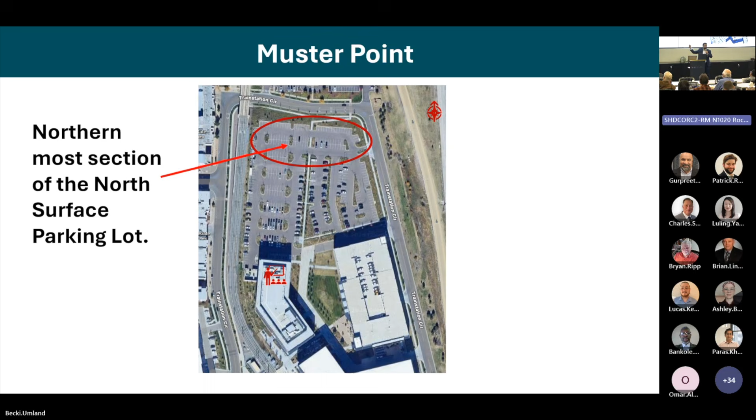If you want to take my photo, that's fine as well.

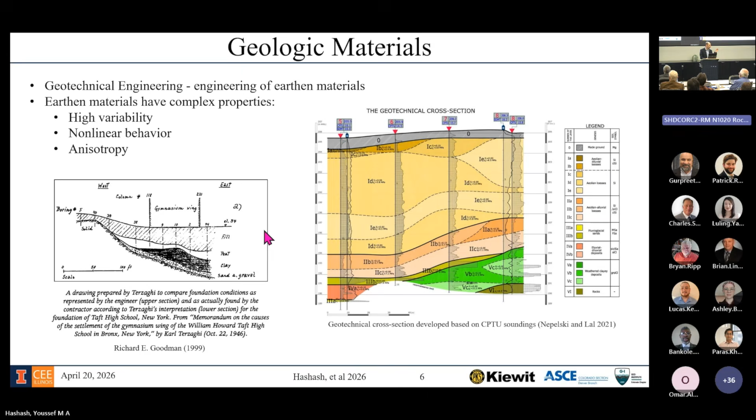And our challenge is not a lot of data—we can never have enough data, right? Now, thinking about the modern discipline of geotechnical engineering...

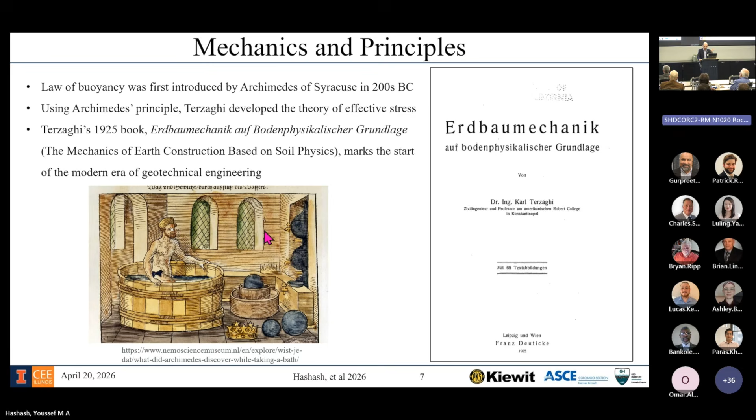Soil mechanics, which is the work that Karl Terzaghi introduced, ushered in the era of modern geotechnical engineering. He cleverly took the law of buoyancy, for example, flipped it, and you got the effective stress principle. Interesting—that's what it is, by the way. The effective stress principle is actually Archimedes' principle, just in a little bit different way. Took a basic concept, looked at it from a different angle. Of course, Terzaghi worked in many, many spaces—soil mechanics, rock mechanics, lab testing, and theoretical work.

He has the book Theoretical Soil Mechanics. So the focus of his is to extract information, data from the tools available to him at the time. Question for us is, can we extract something more fundamental in terms of behavior from modern laboratory data, from modern equipment, and data processing techniques?

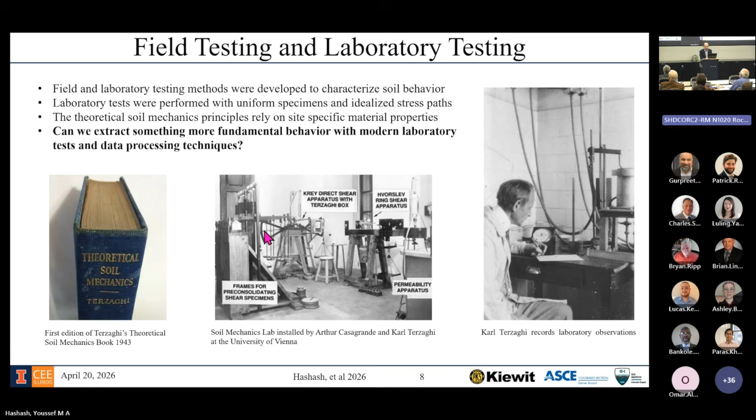The other thing we do is we very much say, you hire an engineer, you send them out to the field, right? Because that's where you're really going to learn about something. Going back to the observational method, which was described in 1969 by Peck, it really all started with the work at the Chicago subway, and of course that's where University of Illinois comes into play. There they established a clear relationship between the excavation support system and the observed deformations, sort of physical world and the response of structures.

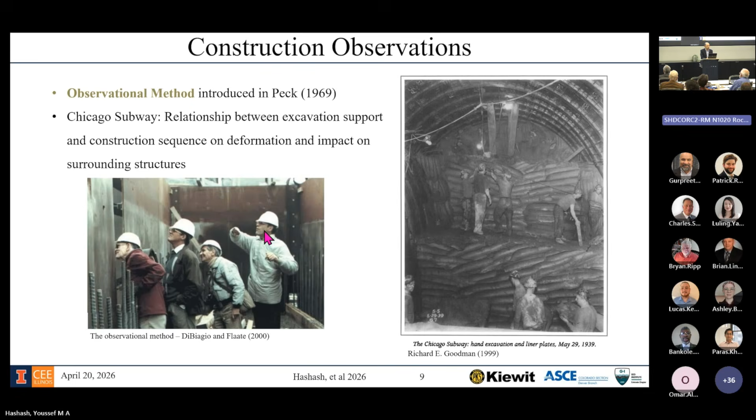Now, if we look at the tools throughout modern geotechnical history, we can go back to 1900 for remote sensing, pigeons with cameras. Of course, now when we think about remote sensing, it's something completely different. It's SPT, triaxial test, CPT, now Internet of Things. We have InSAR, LiDAR, many tools are available to us.

Now, parallel with that, we have tools that we use and we develop to interpret and extract meaning out of the data. Simple graphics, like our plasticity chart, finite element method, going back to '67, personal computers, spreadsheets. Wow, spreadsheets really solve lots of problems. Nowadays, we're dealing with neural networks, and we'll spend a bit more time on that.

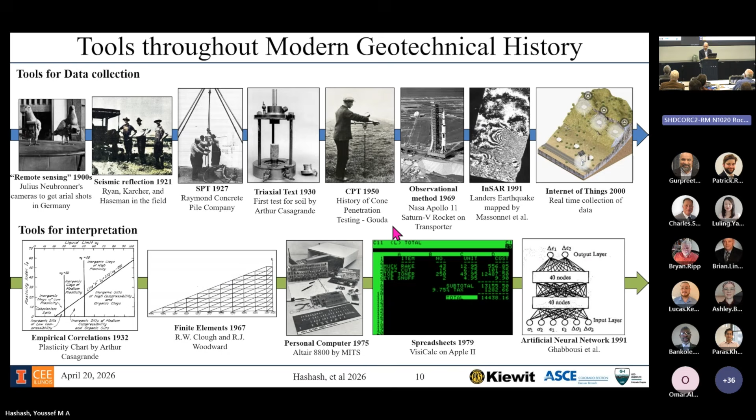So if we think about our discipline, which is heavily an empirical discipline, it's what we call nowadays shallow machine learning. It's correlation between variables. And here on the slide are just some of the ones that we use. Some of them we still use today in our work. But our limited data, which was enough to plot on a graph, has evolved into big data. We are able to capture, save, observe massive amounts of data, almost in a near real-time, near continuous fashion.

The data availability has changed. Instead of dealing with a few hundred data points, we're now at a few million or even upward of billions of data points. The data availability has changed, so shouldn't the tools we use change as well? Let's talk about AI. Give you a bit of a historical perspective. AI in civil engineering and tools, past, present, future. I'm not very good at predicting the future, but I'll speculate.

So the inception of artificial intelligence can be traced back to Alan Turing. If you haven't seen the movie about Alan, please watch it. Brilliant, brilliant individual. Brought in a paper in psychology and philosophy about computing machinery and intelligence. This is 1950. Introduced the Turing test, a method for evaluating whether machines can think. No machine has come close to passing the Turing test. Well, we'll see.

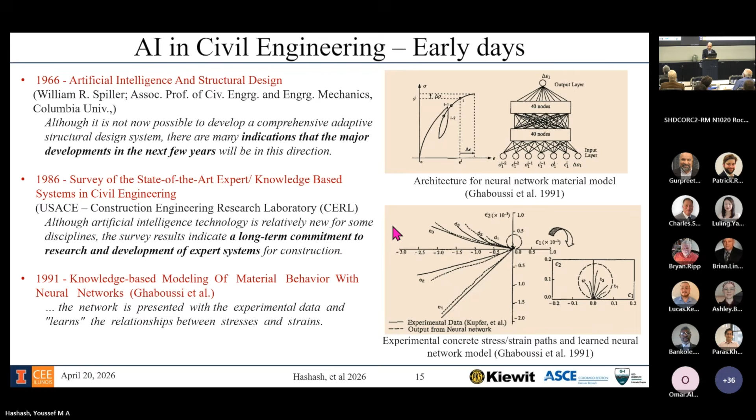So AI, as we know, is I, Robot, 1950. In my era, when I was in college, we would watch The Terminator. And then, of course, Star Wars, drone wars, which are real now.

So let's talk about what is artificial intelligence. And this is helpful terminology from Rome 2021. Artificial intelligence, the science and engineering of making intelligent machines, 1956. And of course, I talked about Turing's as well. You can use it for planning, build control algorithms that will enable an agent to synthesize a course of action that will achieve its goal. Some of what you do with the TBM, tunnel boring machines, is actually planning, a form of AI.

Natural language processing, very important, so that you can actually interpret and turn it into actions. Machine learning, and we can talk about shallow and deep machine learning. And there are many, many different aspects. So we need to think about AI is not ChatGPT. It's not just ChatGPT. There's Claude or Grok. It's a lot more than that.

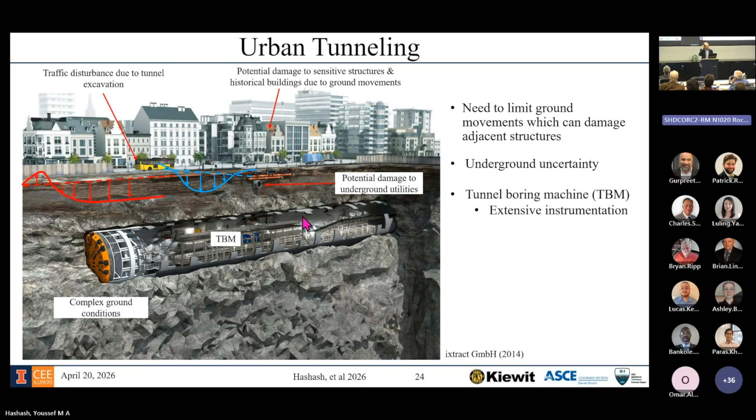The issue we have is in a typical urban tunneling project, we have these phenomenal machines called tunnel boring machines, fully instrumented, nearly fully automated. Some of the newer ones you can actually control from an app, by the way, and you can control every aspect of tunneling. And we are tunneling in ever more marginal ground and also heavily urbanized space whereby we cannot tolerate a lot of movement because of potential damage. So we're trying to control that. So we have a ton of data coming from these TBMs.

Now, we had the fortune, thanks to NSF support, the National Science Foundation. I think we started it in 2017 or 2018, I can't remember now. It took us many years till today, in partnership with the Los Angeles Metro. It's part of an industry-academia collaboration, whereby the kind folks at Los Angeles Metro gave us access to TBM data, all of the instrumentation data for 3 lines, which become 6 tunnels because they have twin tunnels for each. This is a subway that's being built in Los Angeles. And we had the Crenshaw line, the regional line, and the purple line. They changed names now, but this is when we started.

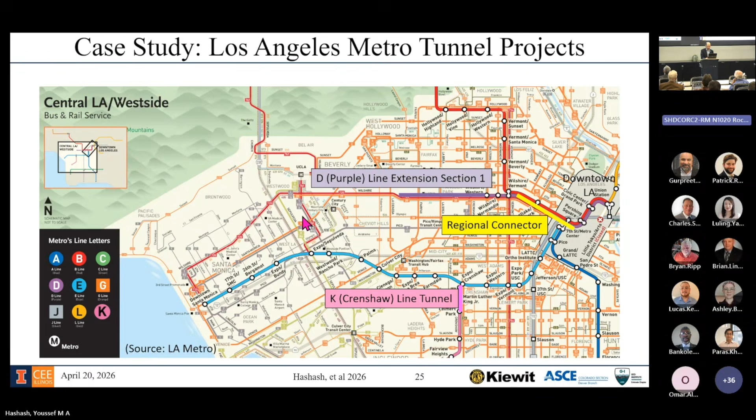So you have these tunnel boring machines. And when you look at the data for these, just to give you an example, for the ground movement we have 3 million data points, and the TBM records 1 billion. And similar order for the regional and purple line. I don't think you can put that in an Excel spreadsheet, can you?

Now, we have 2 choices. One is to trim down, filter the data to have an interpretation, which, by the way, is still important. Don't think that's not important. But are we leaving something on the table? Are we losing or not paying attention to additional knowledge? If we think of data as knowledge, then yes, we're actually leaving a lot on the table. So how can we use all that data?

Well, we have long sequence TBM operational data. We can leverage transformer attention, right? That's the breakthrough. And we create a domain-specific TBM tunneling system tailored for the LA basin. So now it has the local experience, right? We talk a lot about it. I have 6 TBM tunnels and it assists with predicting ground movements, estimating ground conditions, detecting ground heaviness, and potentially controlling the TBM. I don't know if you've been hearing about physical AI and world models. This is the direction these things will be going.

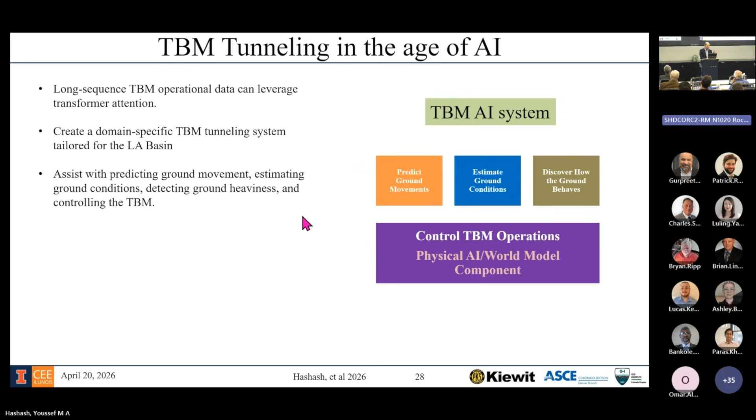I'm not going to go into the details of how we did all the training. This is going to be part of a paper that PhD student Wendy Zhao is working on and finishing up. She's finishing up the last paper and defending soon. In each one of these lines, we have 2 tunnels, like northbound and southbound, or right and left, whichever you call it. We use the data from one, we learn the behavior from that, and estimate the other one. And this is what you're seeing.

Now, I want you to also recognize the resolution of the displacement we're working in, 1 inch, less than 1 inch. We're actually at 0.2 to 0.3 inches. It's actually within the resolution of the measurements. So, but these are the requirements nowadays in urban areas. They want us to be at very, very high levels of resolution, and you need to use the requisite tool to do that. The other thing you can do also, see if you can estimate ground conditions.

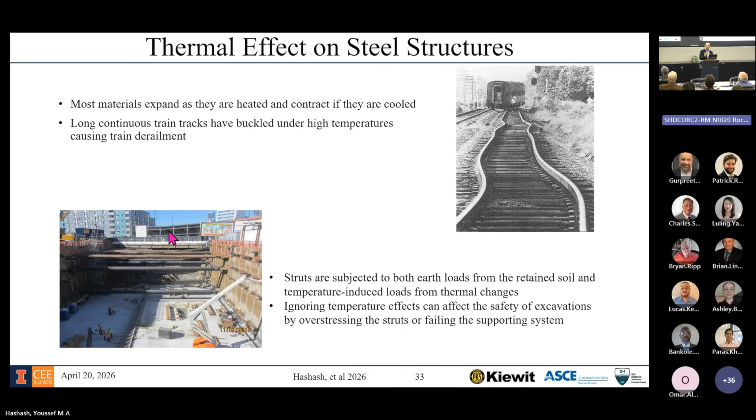But we'll not touch upon that now, but we'll talk about estimating these extra thermal loads, and they can be substantial. Now, the thermal loads are continuous, and the way we see it is that this is an example. We picked a strut from somewhere—I'm not naming the projects—and you can see they actually sync with the temperature changes during the day. It's very clear. We've known it for a long time. This is nothing new.

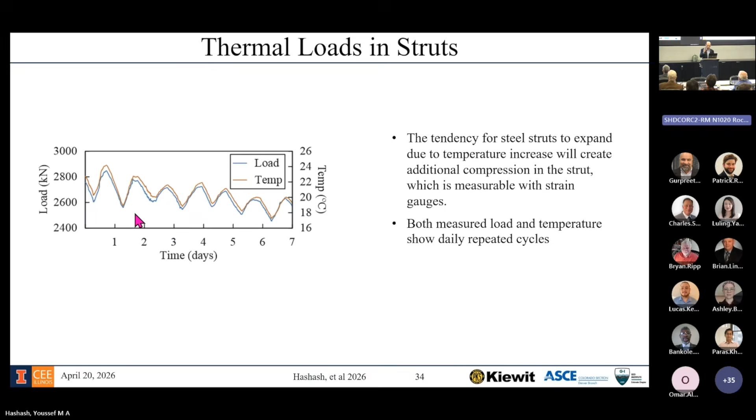Now, there's been many, many studies talking about how you estimate that thermal load. But if you look at those studies, in 2000, we were looking at 1 reading per day. In something we did in 2003, 4 readings a day; 2005, 1 reading per day; more recent, in 2015—not recent, it's 11 years ago—24 readings per day. But on the Trans-Bay Transit Center project, we had 96 readings per day. For the LA Metro, we had them as frequent as 500 readings per day. Okay? Our conventional tools no longer are able to do that.

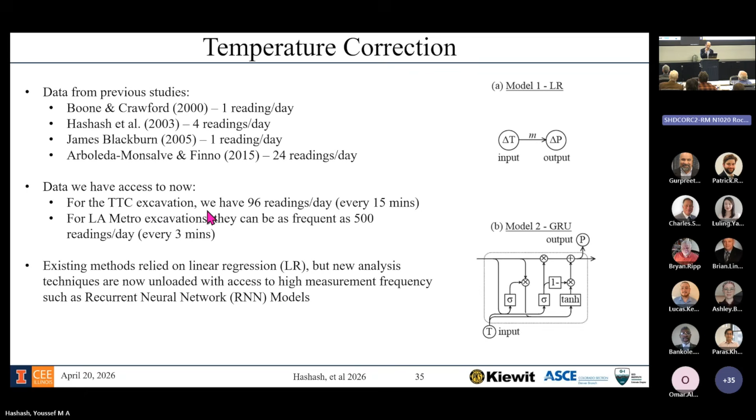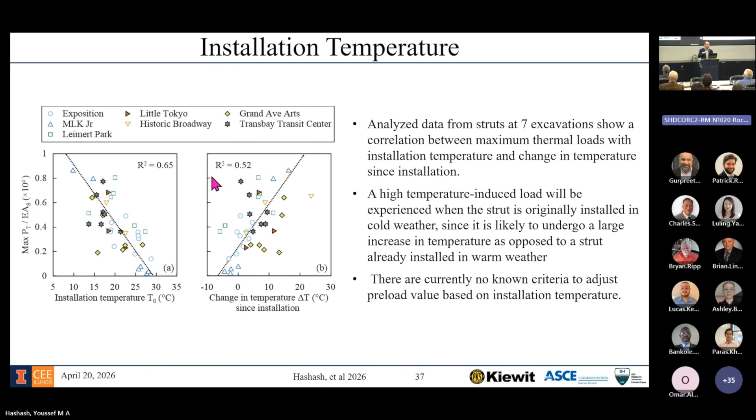And you can then establish relationships whereby we see that if you started putting in a strut on the hottest day, you will not see a lot of temperature load. But if you put it on the coldest day, and we actually preload the struts a little bit, it experiences significant temperature load because of the temperature. We know we can now use that data for something more meaningful and useful.

So let's now talk about surrogate modeling, which many of you might have heard about. I'm going to give you an example of what we're doing for discrete element simulations. As you know, soil particles or even boulders are large discrete elements, and representing them as a continuum in a finite element doesn't always address a particular problem.

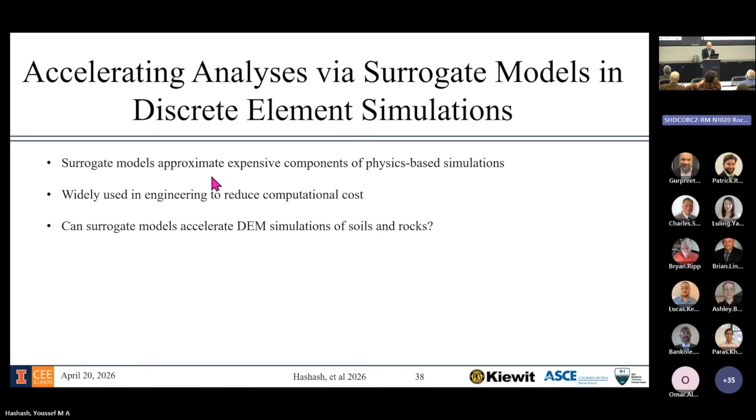So we go back to Cundall in '79, where it says, okay, let's model the individual particles and have dashpots and springs to represent the contact. These are used in many applications: Mars rover, excavation, dumping, conveyor, any type of large material handling, we use these techniques.

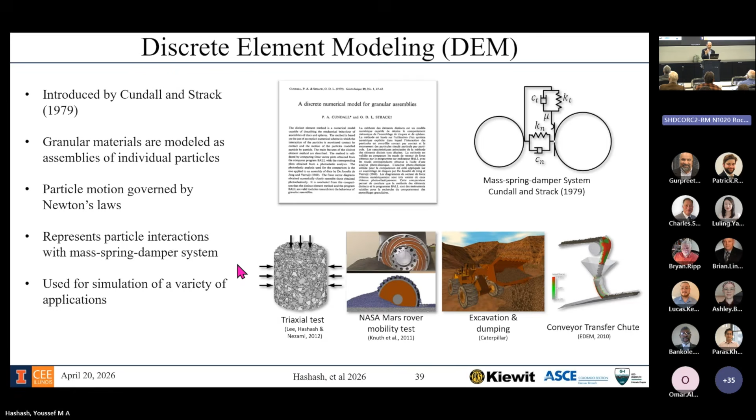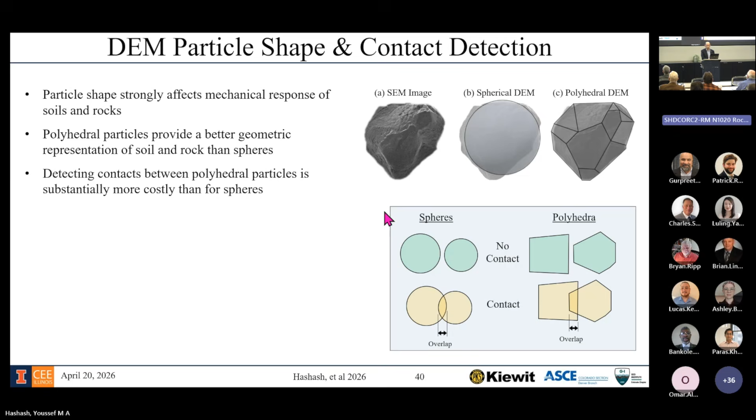The reality is particles are not spheres, the ones we deal with. So really we would want to represent the soil, or boulders, or whatever particles you're dealing with, more reliably or more faithfully by putting in polyhedral particles.

The problem with those is the issue of contact detection. Contact detection takes about 75% of the computation, and for polyhedral particles it's an absolutely demanding computational part. That slows things down, which means it limits the application and use of these particles.

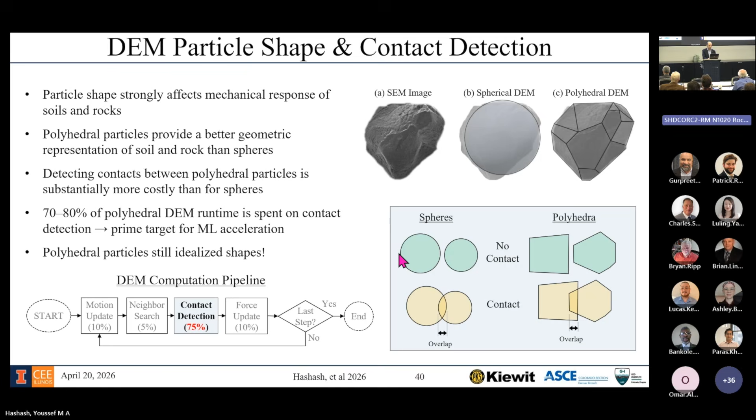Now, before we got into the surrogate modeling, we had established a technique whereby we were able to hit a record polyhedral number of particles, 50 million, on HPC machines.

One of the ideas was: can I replace this very, very computationally demanding contact detection with an artificial neural network—again, I'm not going to go through the details—whereby you train it once, and you can then estimate for a large number of problems.

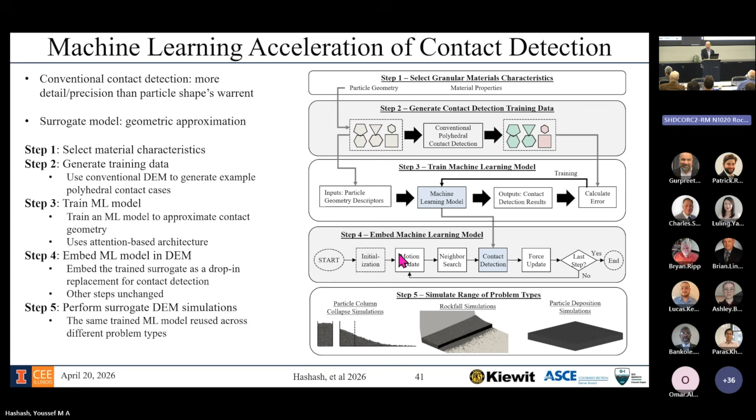And the answer was, we actually finally had the breakthrough. I've been trying that for over 10, even maybe close to 15 years, to try to replace the contact detection, but the technology wasn't ready.

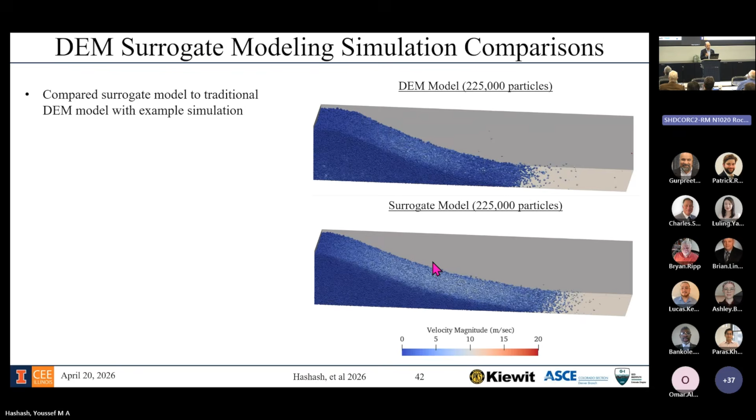So here's a simulation of the DEM model versus a surrogate model, and you can see its particle flow looks pretty reasonable. We also had quantitative metrics, looking at the forces, boundary forces, and we found that it works well. The speed up was around 4 to 6 times.

But what was more important is the reduction in memory. What's also more interesting is that we could now put some of the calculations on a GPU. Before, we had to do a lot of the calculation on a CPU because we needed double precision. This one, the GPU can actually go single precision or even half precision.

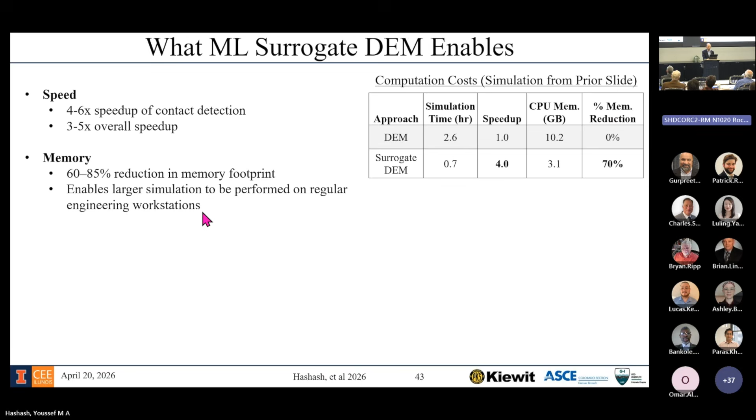So some of the precision in our calculations, we don't need as much, so huge reduction in memory demands. We're now working on simulations of 200 million particles, record numbers, so that we can use it in more regular engineering work. Companies like John Deere, Caterpillar, etc., use these techniques for their simulations and machine prototyping.

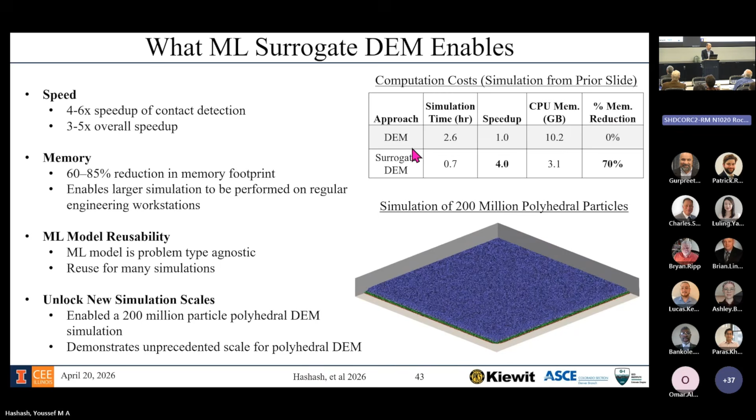Okay, so now let's talk about another application. This is something we did way back, and we found that it actually fits very well with what we are thinking about these days: physical AI and connecting with the real world.

How do we take our field instrumentation data and use it to extract underlying soil behavior so that then we can use it in forward prediction of conditions? That actually took us back. You always have to step back in time, go back to the fundamentals, and then move forward.

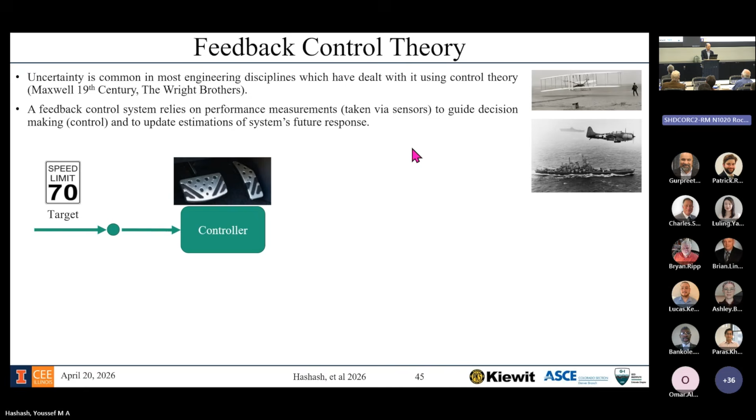If you go back to the concept of feedback control theory, this is actually what enabled flight. Let's talk about maybe something we're more familiar with, cruise control. You have a controller, system, output, and it goes back. And now, of course, we have adaptive cruise control. And those of you who have the latest Tesla with self-driving, wow, right? You can do some really, really cool stuff. But keep your hands on the steering wheel, okay?

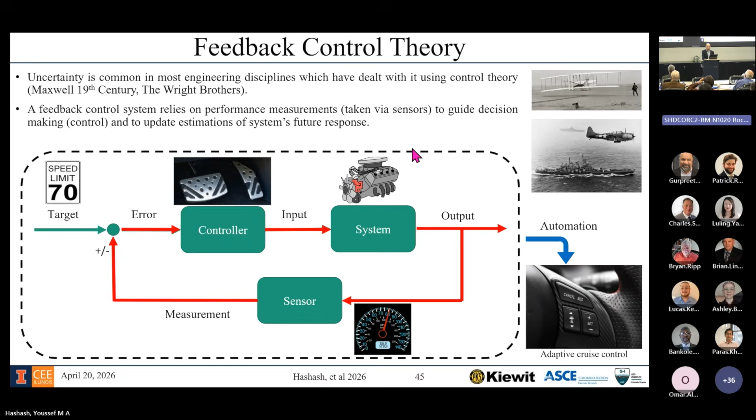That is the feedback control theory. The observational method is actually a form of feedback control theory. Keep that in mind. The same way we thought about the effective stress principle, it's the inversion of the Archimedes principle. That's the same thing.

So in engineering, we have design objectives. We do our site investigation, design, and then we go to construction. We acquire data, we store the data, we try to update our model, especially when the response is not consistent with our observation, make adjustment, and then go back. You see this loop? This is what we do all the time. Question is, can we automate it?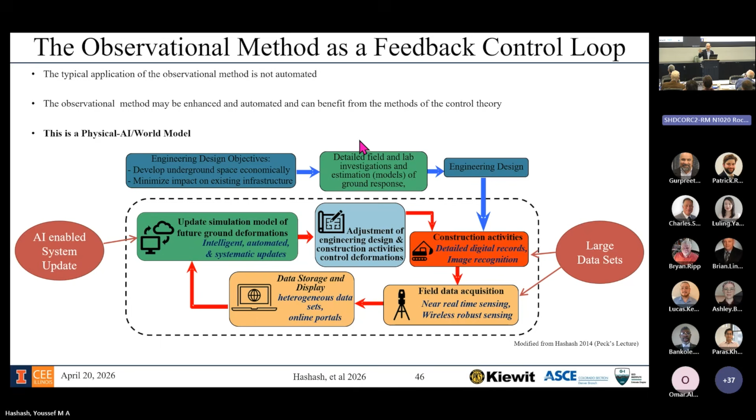Think about each one of these as an agent. That's the future, okay? I'll show you a little bit of semi-automation, but the future will be a lot more automation. Human will always be there in the loop, but we have more capabilities nowadays.

So the way we did it at the time, we took the coupling of construction sequence and field measurements, and instead of doing one simulation and expecting the other result, we did two separate simulations: one with the construction sequence, one by imposing the measured displacements. We used one to extract stresses, the other one to extract strains. Stress-strain is what? A soil model.

We use that to train a soil model. We repeated that multiple times, so the model is evolving so that the two analyses give us the same result, because that's actually what we have. And you can do that.

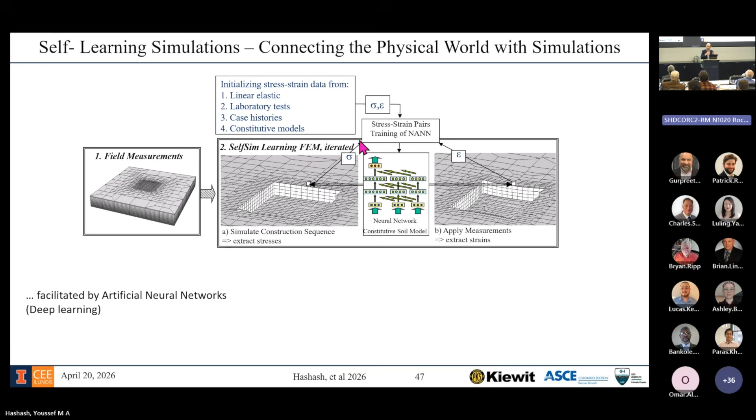People were using, if you're familiar with optimization, whereby people change stiffness, etc. The problem is you cannot make a linear model nonlinear. This will make linear, will become nonlinear. It'll evolve to whatever it wants to do, and then you can use it to predict future excavations.

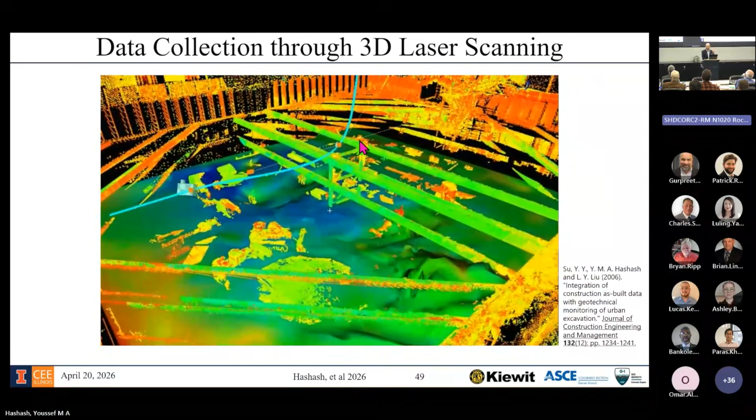Of course, we have now capabilities of capturing the construction sequence. This is LiDAR. We were the first to use LiDAR for excavations. It was 2006. Can you believe 20 years ago? That's how I feel old.

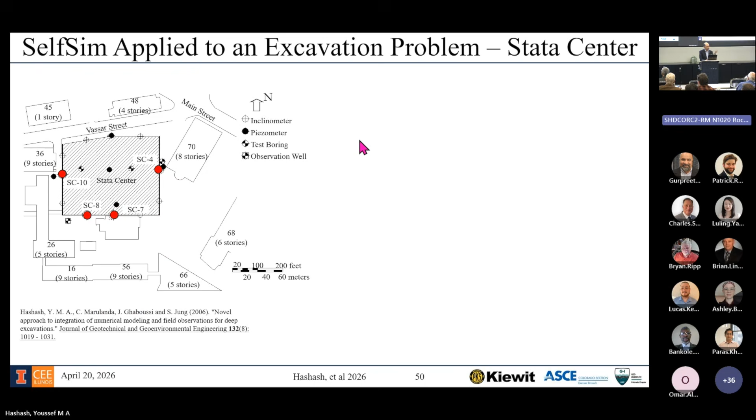We had, thanks to Professor Andrew Whittle, access to the data from the Stata Center at MIT, whereby we had both the construction history and the measurements. So this was our measurements of displacements, and we said, okay, we're going to let the system, the self-learning simulation, start, and we assume first the behavior to be linear elastic, and then we kept on doing that process that I mentioned to you.

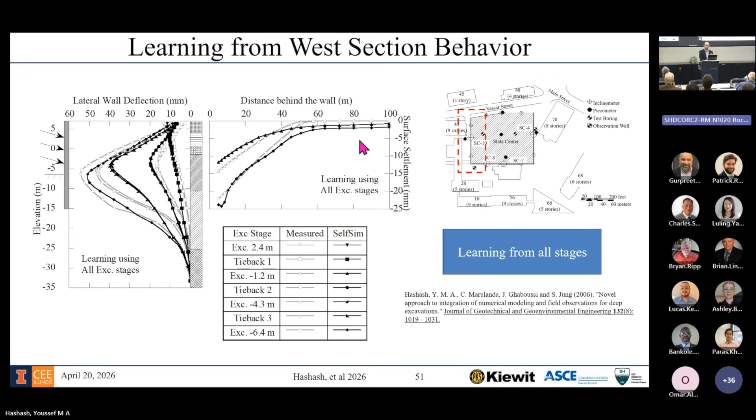It's called elastic initialization, and then we forgot. We told the neural network, forget elasticity, evolve as you wish. And then in terms of overall behavior, it actually captured it well. Now, we then compared that to measured data, and you can see here, I evolved from a linear elastic to a nonlinear behavior that's closer to what was measured.

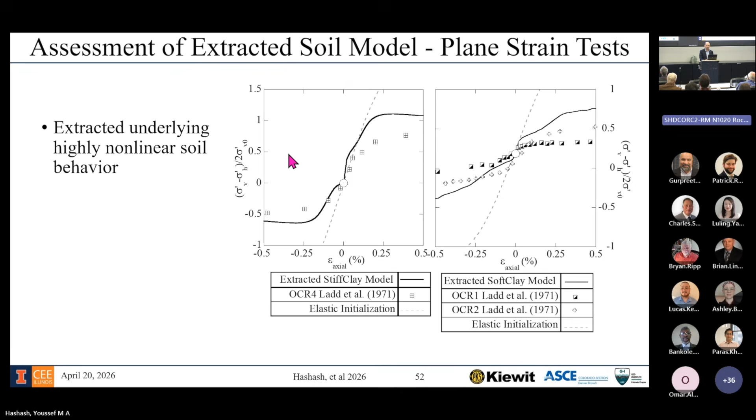Now, people said, well, you have non-uniqueness, it's an inverse problem, etc. Turns out the constraints here are so severe that actually you do not have that aspect of non-uniqueness. We tried it. We tried to break it many, many times. We couldn't. Okay, now let me pivot to generative AI because I still have more stuff to talk about.

So it's basically part of it. And now I think the rate is much higher. ChatGPT, Gemini, many, many tools. But now they're getting far more sophisticated, more capable.

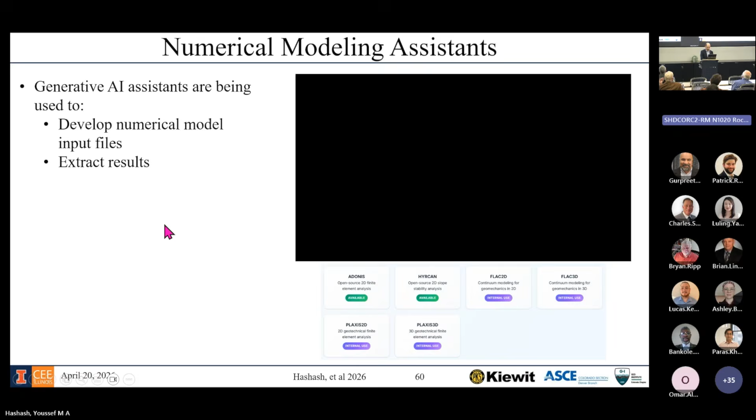Now there's also far more broadly, more commercial tools. I think this one has video, just watch your ears. I actually said there isn't, but there is some, let me see here. Okay, so geosim.ai. By the way, I don't have any stocks in these, I just picked ones that we are seeing.

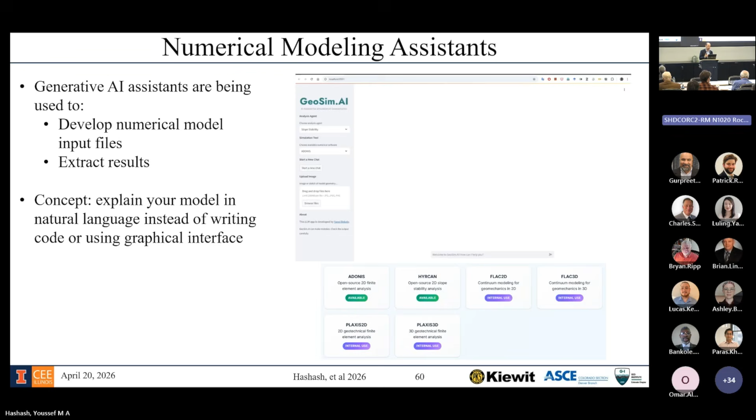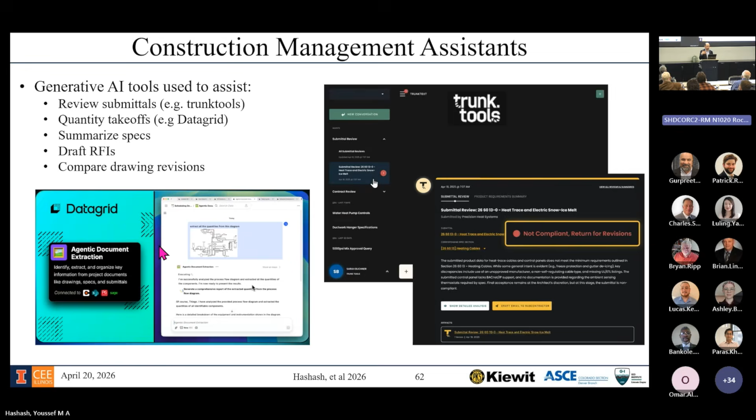There's a lot coming up in the market, and eventually the market will filter things out. But what people are doing, they're trying to use geosim AI, to use AI for simulations as an assistant for compliance reviews, to make sure you are complying with whatever it is, code, environmental specs, etc. The market is exploding in many different spaces, in law, in medicine. And then there are now construction management assistants popping up too. Eventually there'll be a few winners, that's how the market works. They review submittals, quantity takeoffs, summarize specs. Drawing tools by Autodesk are coming up as well.

So now let's go into the future. We're going to see a lot more domain-specific agents, like a geotech agent. And even within geotech, we have agents of agents that will connect things. But remember, at the end of the day, our job is to deliver an infrastructure solution. So we need to make sure everybody is speaking to everybody else. Our AI agents will speak to each other, and everybody uses them, puts them in, and then the agent of agents will tell the structural engineer, you're doing something here that is not consistent with the geotech. Talk to each other, maybe. Or vice versa.

How do we develop these? That's actually the challenge for us. We're talking about using these large LLMs with your own domain knowledge or company-specific knowledge. We're now hearing about system AI, holistic end-to-end. Why? Because it's the delivery of an infrastructure solution, not a single predictive model, and an integrated workflow. The workflow aspect is key here. You will always have a human in the loop. You want to have explainability. You have to have ethical considerations, regulatory adherence, and the role of the engineer. Our role as engineers now is to understand how these systems work and use them. These are really sophisticated calculators.

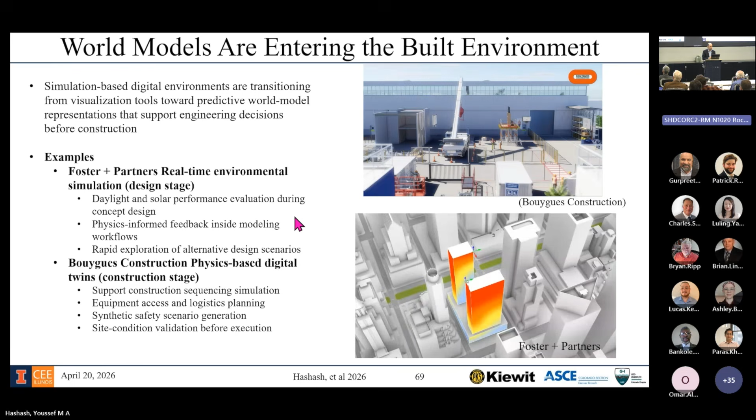World models are entering the built environment here, for example. So you can see some people are attempting that. So are we out of a job? Well, if you ask Gemini, I'm not expecting you to read it.

It changes the engineer's job description, but not the need for human professional judgment and accountability. It might help you a little bit with the shortage in availability of engineers, but the engineer who is engineering is going to still be very much pivotal there.

But what do we need our engineers to be good at? Know how to ask the right question. And guess what, this is not new, right? Even in our practice, when we have a project, all of us have to ask the right question so that we can solve the right problem. Well, with prompt engineering, it's about that, and it has evolved a lot, and I think we're going to learn.

Will we be making mistakes? Of course we'll be making mistakes. Like we never made mistakes before AI, right?

Also recognize that there is hardware now that is coming in with AI native to it. For example, this particular laptop has an NPU, a neural processing unit, so that Microsoft has their own little neural network that lives on this computer, and it speeds up my calculations. It does them all local with my queries. That's the future, and we're going to see a lot more of that.

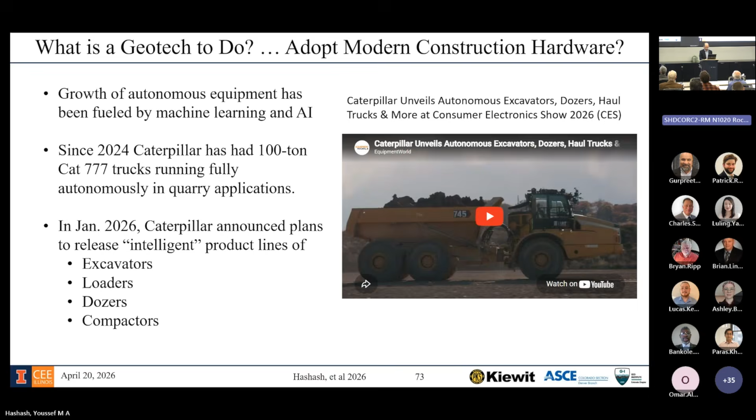Also, modern construction hardware is actually seeing that. Autonomous Caterpillar is having these fully autonomous in-quarry applications. This world model, physical AI, is being connected completely to that. So you could imagine a future whereby you can actually run through an entire project virtually and see where the problems are in construction before you actually break ground, improve the design, and then go and execute. I would assume companies like the company hosting us would probably be a pioneer in that space.

Now, how do we build domain guardrails? Because there will always be concern about it. So we wrote a paper that's going to be published soon in Geostrata about the risk of adopting generative AI, but actually it's about how to make a risk assessment of it. This is being led by Professor Zenon Medina-Cetina at Texas A&M.

Another one is looking at building domain type controls, a paper by Professor Krishna Kumar, UT Austin, with the problem of lateral spreading, whereby he considered four constraints so that we can keep those guardrails. So what we need to do is step back, think about what are the really, really important, significant guardrails, but we need to be careful not to over-constrain it. Because some things we think of as guardrails may actually be untrue. Why? Because we now go back to basics.

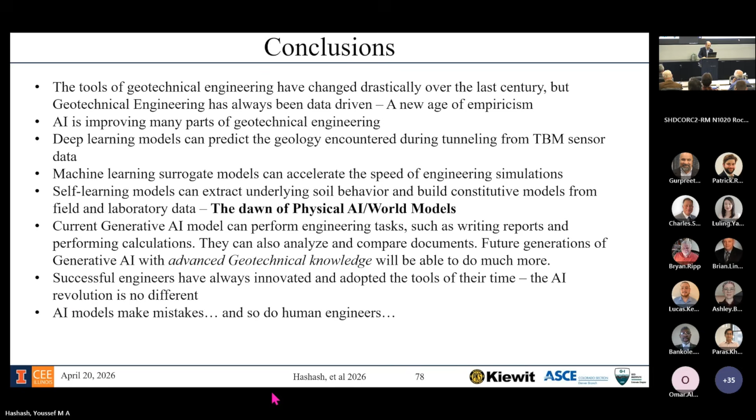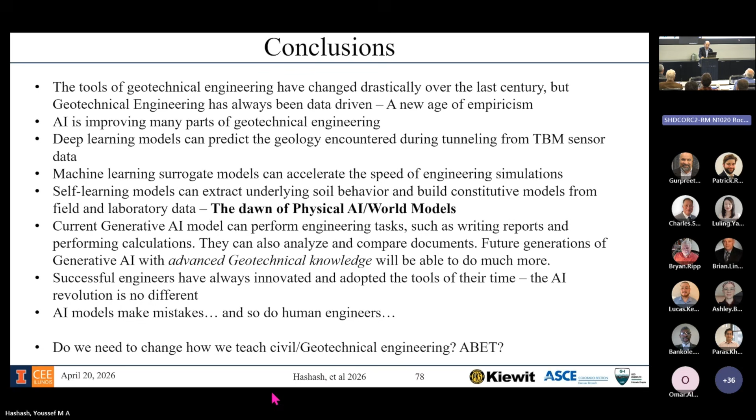Successful engineers have always innovated and adopted the tools of their time. The AI revolution is no different. AI models make mistakes, and so do human engineers. I think all of us have seen it, either we've made mistakes ourselves, or seen some of our colleagues. Last one, as an educator: do we need to change how we teach civil geotechnical engineering? Do we need to talk to ABET? You probably know from my rhetorical question where I stand on that.

And to end it, thanks to Pawan Kumar, who is a musician and a geotechnical engineer at Arrow, he asked Grok, I think, to write a song about earthquakes in the style of Pink Floyd. And there you go. By the way, if you prefer Shakespeare, it will do that for you as well. So thank you, Pawan, for that.